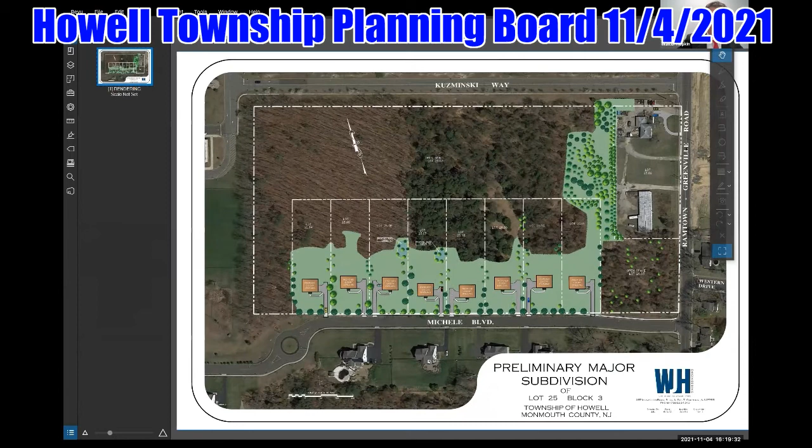I don't have the exhibit list with me, but I do have a rendering. Is this what's listed as A3? Yes. Did you submit this to me? I believe we did. If we didn't, I can switch over to just the black and white subdivision plans, because I don't believe I have this one. Let me, I'm having technical difficulties here. I apologize, I'm having a little bit of trouble. Take your time. You want me to put it on the screen? I think I have it, it'd be easier if I could refer to it. Let me, I know I have it, it's just a matter of getting it in front of you. There are many good things about virtual meetings, but one of them is not sharing screens.

Okay. Thank you for your patience.

So I'm referring to page 4 of A3, which are the subdivision plans that were submitted to the board, last revised October 20th, 2021. And just to reiterate a little bit of what Mr. Herbert indicated, the overall tract size is just over 20 acres. It's at the corner of Ramtown Greenville Road and Michele Boulevard. It's also bordered by the access way to your elementary and middle school, which is Kuzminski Way. There are existing buildings and an existing home that front on Ramtown Greenville Road, known as 238 Ramtown Greenville Road. It's all one block, also known as Block 3, Lot 25, and it is located in your RE2 zone. To the north of the site is the elementary school.

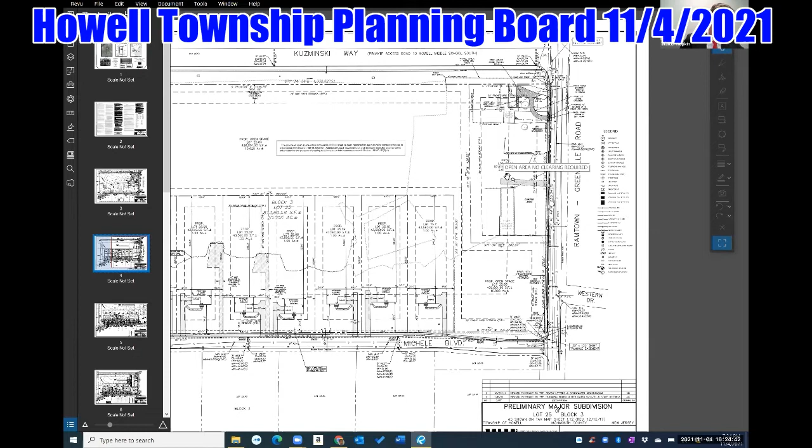So again, we will be cleaning up the lot that fronts on Ramtown Greenville Road. There will be 7 lots proposed. All of those will front on Michele Boulevard. If you drove through this area, it kind of looks like something should or would be proposed here. There are no new roads.

So the benefit of this is that you will get 7 new homes without any proposed roadways. The infrastructure is there for both water and sewer, which we will access for this proposed development. We will also extend sidewalk. Sidewalk is not currently on that side of the road, and we would extend sidewalk along the frontage as well.

There is 313 trees being proposed with this application. That's a combination of street trees, trees throughout the lots, and replantings in the area of clearing behind the existing home.

We met with your professionals, Ms. Spiro, and I believe we're in a situation where we do need to plant additional trees, but it was the feeling that we didn't want to take more trees down to install more trees. So it was our opinion that we proposed the 313. That was what the site could accommodate, and that we would make the monetary contribution in lieu of the remainder to comply with your ordinance.

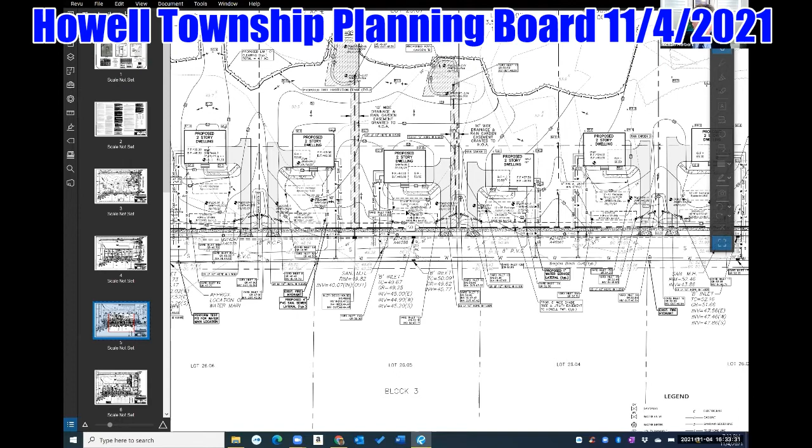Walter, just to emphasize the green area in the back, we're talking about the hash line in the back where the trees would remain. That's going to all be protected by a deed restriction, is that correct? We don't have that on the plan, but I believe it was raised by one of the professionals, or maybe even the applicant, as a good idea to ensure, because these are large lots, deep lots, that additional unnecessary tree clearing doesn't occur.

We could provide a conservation easement for review by your professionals. And again, we have worked closely with the board's professionals on this, and we do appreciate all of their input. They were very helpful in helping us design this in a way that would make sure the neighborhood was well protected and that we had a good product for the town. Is that correct? Yes, it is.

Anything further, Walter? No, I'm open to any questions that the board or the professionals may have. I hope I touched on all of the points that your professionals have asked us to clarify. And I can submit to you that any of the technical comments in either your board planner or engineer's letter, we would comply with as a condition of approval. Thank you, Mr. Chairman, the witness is yours.

Thank you. Not sure if anybody else on the board has a question, but could you point out with your pointer what you would consider the tree line that would remain, and then the remainder, which I'm assuming would be part of a deed-restricted conservation easement? Yes. So with this plan I'm tracing now, hopefully the board can see. Yes, so this would be the tree line.

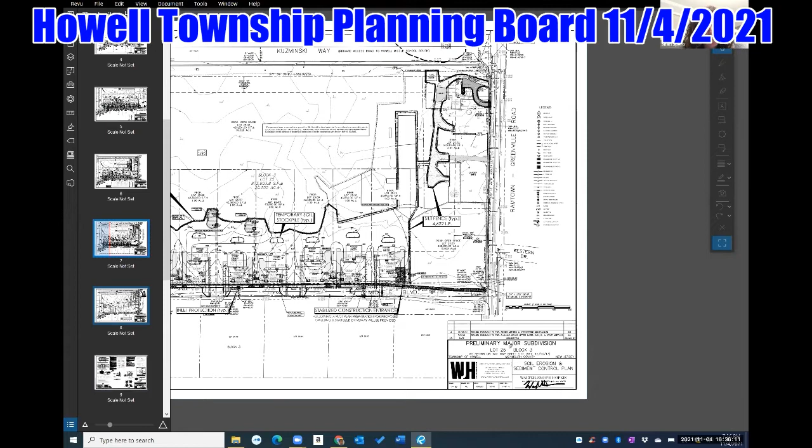Sorry, when you were just tracing that line, there was one discrepancy we saw on the plan. It's correct on the sheet you're on right now, but incorrect on this sheet. You see that square rectangle shape on the first two lots? That's supposed to be saved, but some sheets show it being removed. We noticed that too, and thank you for pointing that out. We'll clarify that on the subsequent submission.

Mr. Chairman, I have a question for our attorney. The first rendition they showed us, the color one, is that acceptable to put up for us to view, and for the people watching this to view? It's a lot easier to see, but since that wasn't submitted, can we use it? Well, we could use it, but it has to be marked in. So let's mark it in as a new exhibit, since that's much easier for all of us to see instead of looking at these.

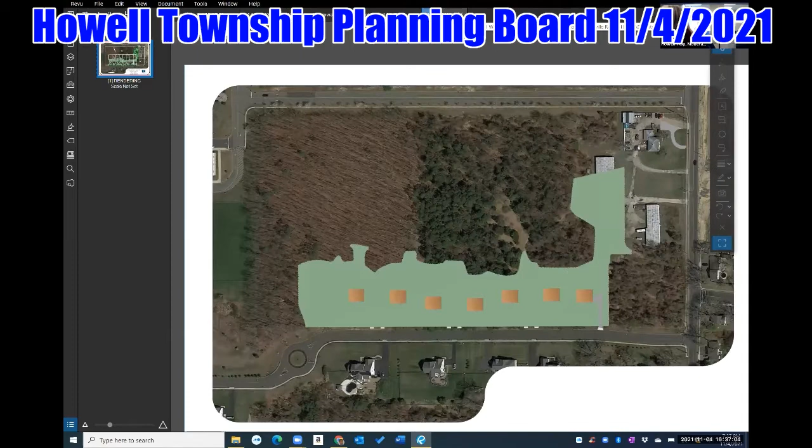I would agree. That would be A8. A9, I apologize, A9. And if Mr. Hopkin could at least identify it with dates and names for the record, please. Sure. What I'm referring to is a color rendered version of the plans that were submitted to the board. The date of the plan, the exhibit I'm referring to, is August 4th, 2021.

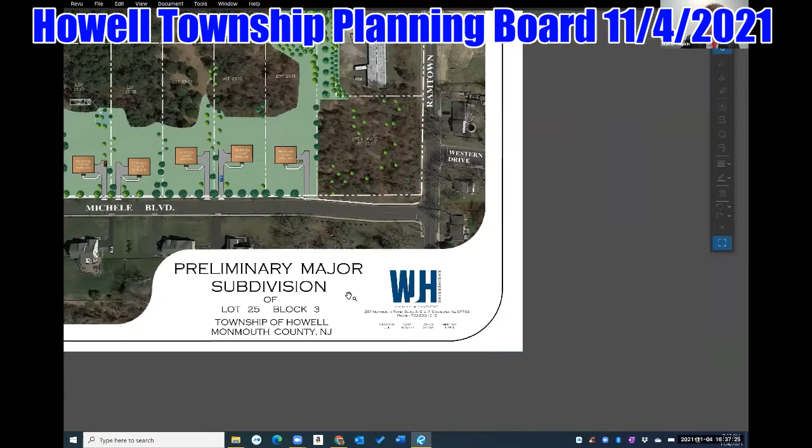Again, it's a color rendered version of the site plan, of the subdivision plan submitted, with aerial information superimposed. So this is much easier. Would you just make sure to send that to me, please? I will. Thank you.

Okay, thank you. Does Ms. Bell? Brian, before you go to Ms. Bell, I have a question.

I had an opportunity to walk the site, actually with a resident who is the HOA president. On the site, there is a strip of grass in front of the lots being proposed, that I was informed belonged to the previous HOA. So can the attorney or the engineer confirm, does their survey show who owns that land?

You're saying that the HOA owns the land on the other side of Michele Boulevard? On the strip, again this is what I was told, on the strip where the driveways are going to be encroaching. So from the curb to that strip of grass that's existing there now.

Mr. Nicastro, what I might suggest is, and this occurs sometimes, there is an area between the curb and where the applicant's property starts. That area is the municipal right of way. Some people see the curb and aren't sure what happens behind it. In this case, between the curb and our client's property is the municipal right of way. We did do a survey, because the HOA has been maintaining that area and not the township.

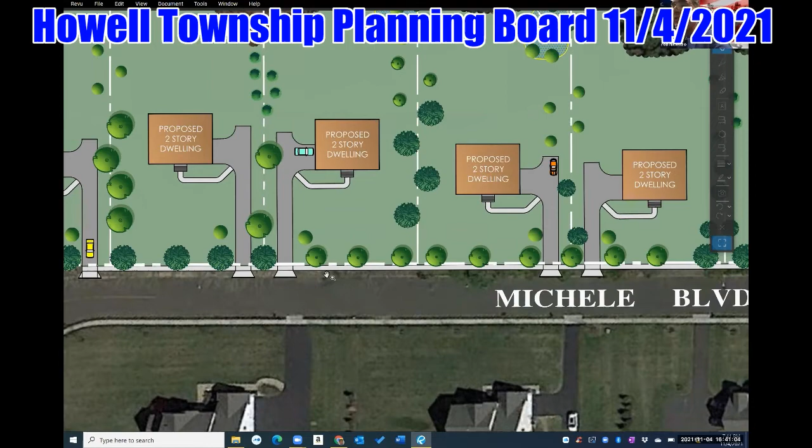I'm not aware of the HOA owning these entities. I do know that there's an inlet there. We wouldn't normally research whose responsibility it was. Well, I'm sure that resident is on as well, so I'm sure that what they have and what you have corresponds, or.

We're talking about a drainage basin that is on the corner open space lot, on Michelle and Ramtown Greenville. I don't see what it is, but again, my understanding is the HOA is responsible for that as well.

I'd like to hear more about it, but our client, the HOA, would accept that as part of this HOA's responsibility if it's on our side of Michele Boulevard, both the mowing and maintenance of that basin. Well, the only question is who owns it, and will you be impeding on their easement if it's the other HOA's?

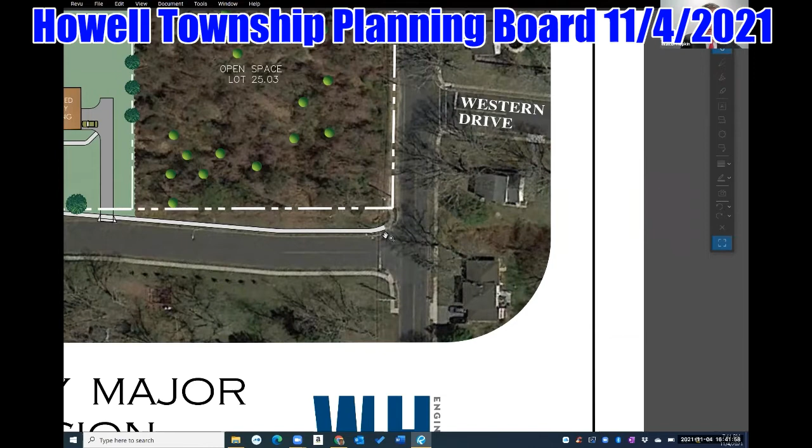I understand your point. There's nothing in our survey of this, nothing for us to believe that this is anything but a municipal right of way. But if there's additional information, we'll certainly review it. What raises my concern is that the township hasn't maintained it and has been making the HOA do it, and typically if it's the township's, they would maintain it. I think that's something we're going to have to investigate.

I can represent to you that we will maintain it. If we are approved here, we will maintain it. But we also have to make sure that we work it out with the other HOA as well. We don't want to impinge upon their rights.

You can maintain it, but if you don't own it, and they own it. That's exactly what I was trying to point out. Okay, so we'll get to that. I don't want to be late, but we'll get to that. But again, we want to be good neighbors, and we would maintain it.

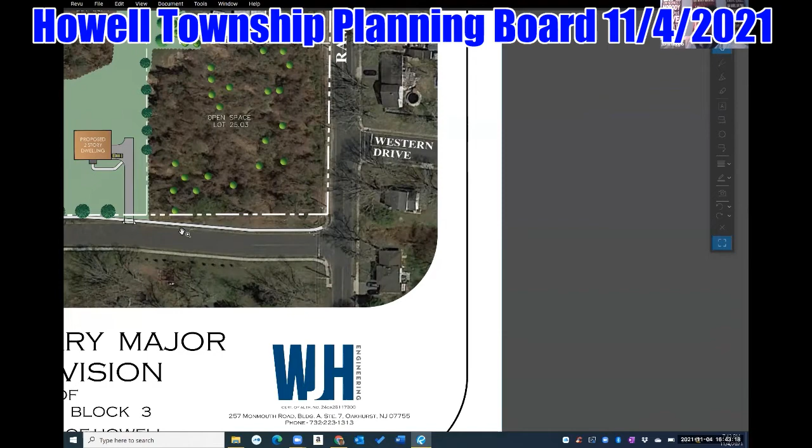Mr. Nicastro. John, you calling me? Because I could barely hear you. Can you hear me? John, you have a lot of echo. Volume in your mic is terrible. I don't know what to tell you. Still nothing? Can't hear anything? Try sitting back further from your mic. John, we can hear you, but it's very distorted. We can understand what you're saying, but it's very distorted.

Well, I have a couple questions too. As far as these recharge systems that they're proposing, collecting, can you hear me? Are we trying to suggest that there's going to be no runoff from those 8 existing, new lots? There's going to be no runoff from the driveways or the sidewalks going into the street? Because there's an issue on Michele Boulevard with their retention basin that's in the back of the property.

That they maintain, like Mr. Nicastro is talking about, that overflows. It doesn't empty out. They have a lot of issues back there with the builder. So any water that's going to come off of these 8 driveways onto Michele Boulevard is going to go into the sewer system and collect in their retention pond back there, which the people that buy these houses are not going to be paying for in their water bill.

Well, Mr. Leggio, if I could for a second, let Mr. Hopkin answer the question on whether that is in fact the case. Will any of the runoff from this development run into Michele Boulevard? So the site currently does drain towards Michele Boulevard. A significant portion of it does.

Is there any reason, Mr. Hopkin, looking at your topo plan, if you could pull that up? I believe it's sheet 5 of 11.

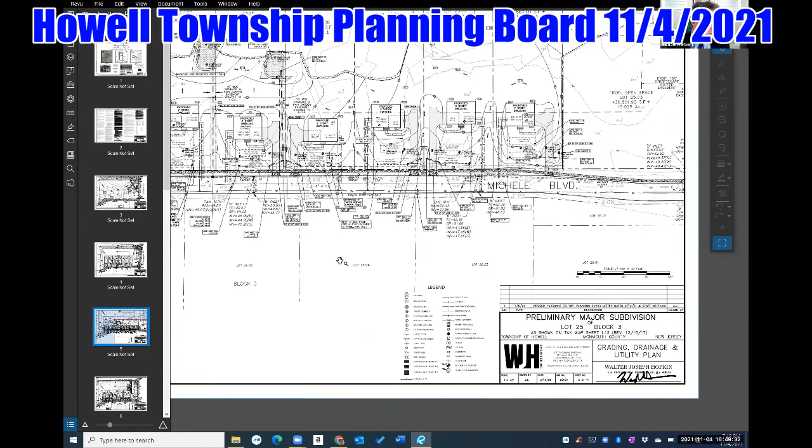By the way, Mr. Chairman, I don't know if Mr. Leggio could also call in on his phone, that way we could understand him a little easier. I don't know if that's possible, just a suggestion. It is possible, he'd have to log out, log back in. Well, I was thinking maybe he'd call in separately and just mute himself on his computer. I'm just trying to think of an easier way to understand him. See what the audio settings look like. If you go to Mr. Leggio, click the little arrow to the right of where you'd mute, click on audio settings. There's a slide bar for adjusting the volume of your mic. It may be that the volume is too high and it's over-modulating your voice.

Mr. Chairman, it sounds like you have some experience. Sorry, the electrical geek in me. I love it, I love it. I think we've all become electronic geeks with this pandemic. It's definitely increased the curve, that's for sure. Especially for us lawyers, I went to law school because I can't do this stuff.

Mr. Chair, if I'm figuring a few things out, I did have a quick question. Sure, just a minute.

From my understanding, the recharge systems essentially operate the way a septic leach field would. It's not a tank per se, but it is a passive drainage back into the water table. Is that right, Mr. Hopkin? Yes, that's similar. The tanks are for elimination or reduction of solids, and the fields let the liquid go into the ground. So it is similar, yes. Right, so in this case, you're using just the field minus the tank. Correct.

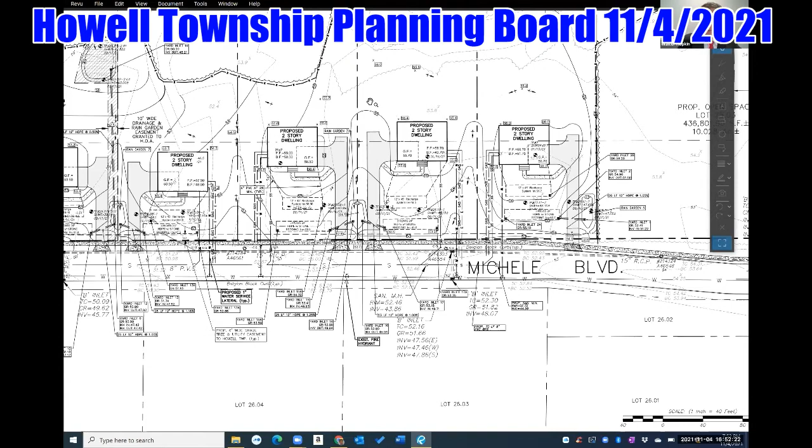Is there any reason why the grade couldn't be shifted so that the water drains towards the back of the homes and into the woods? Is there a reason for how you've done the grading? Yeah, because this is the way the natural grade goes. To shift it, it's called bucking grade, so we'd be sending water where it doesn't go now. This site, for the majority of it, drains towards Michele Boulevard.

Is the applicant aware that the middle school south also has their own drainage retention pond that overflows on a regular basis onto Michele Boulevard?

I'm sorry, but I couldn't make out what you said. We can't hear you, John. Can you hear me? A little better. A little bit. Just coming through really garbled. Yeah, if you go back to that same upper arrow. I did, Ryan, there's something that says switch to phone audio. You may have to use your... Switch to what? Switch to phone audio. You see it? Muting, it has no jack mic volume, that's all it's on here. I don't know, I'm not computer savvy. You still can't hear me? We can hear you, but it's so loud. It's not, we can't understand you. Is there a chat function that maybe he could ask his questions through? No. Yeah. I'm sorry, Mr. Leggio, I apologize. It's just difficult. Let me try.

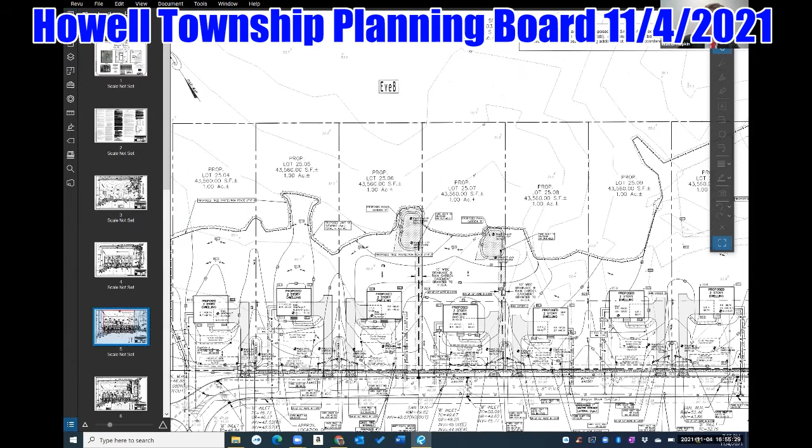I think we're eliminating that. Let me just make sure, thank you for clarifying. It wasn't just within the sight triangles, it's our intention to eliminate these variance conditions. You can see it here on Kuzminski Way, at the very top there's a proposed fence that extends off the existing fence. I think this is your existing conditions plan. Yes. So maybe on your site plan...

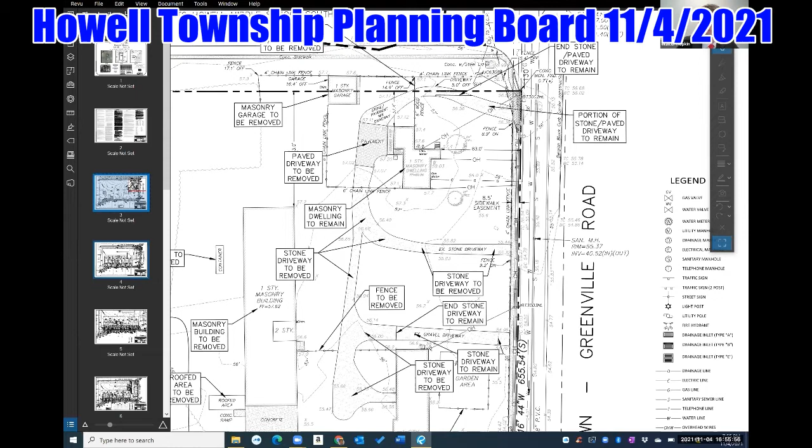Install 30 linear feet of chain link fence in addition to the existing. So is that still what you're proposing outside of the property line? I think that's just to reestablish that fence when the garage gets taken down. I believe it's the middle school or the school property's fence, so it would... we can take it down, but it was our intention just to reestablish it.

So you're saying you're doing it for the benefit of the school? Yes. I still think it would be a variance for that reason. Yeah, I mean, we can get rid of it, it's whatever the board's pleasure would be. Mr. Rizzo, if it's our decision, I would recommend that if the school board requires it to be maintained, it's maintained. If not, it doesn't need to be, and the applicant should go and ask.

I think that also goes in line with the fence in the sight triangle, which you can see on this plan too, that's the same fence line. So if you're keeping one, you're keeping both and vice versa. Let the school make the decision. Okay.

How's the school going to make the decision? That's not for me to figure out, the applicant will have to figure that out, right? We would go to the school and ask them what they want, and we'll comply with whatever that is. You can make it a condition of approval that we consult with the school and abide by whatever they want us to do with the fence. And if they can't do that, Mr. Nicastro, they'll have to come back to see us. We come right back to you because we want to make the board happy.

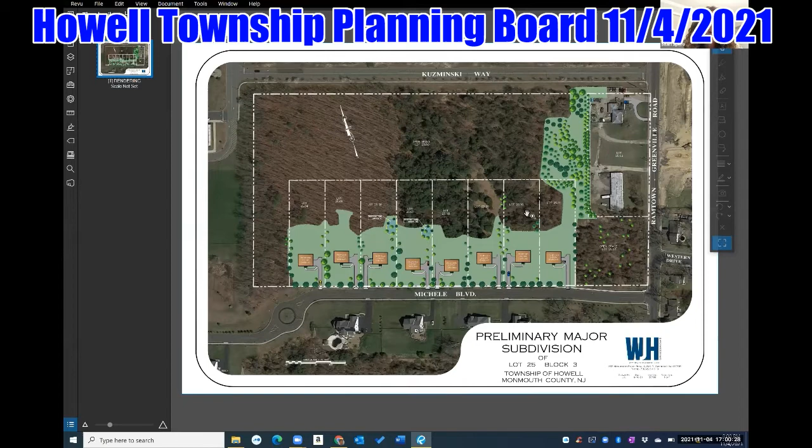So see in this picture, you see the wood. Yes, so that's the rectangle that was missing on the other sheet. So this is what currently exists. And it's kind of neat, you can see there's more evergreens on the right side of the property than on the left. This is a winter picture.

So you can't really just throw more trees in the treed area because they won't establish in the woods like that. We would have to put it in the light green area, which is just the homeowners' lawns. Fair enough, now I see what you were trying to explain earlier with that line not being right. Okay, yeah, all right.

So your recommendation would be to contribute to the fund. Yeah, I just feel like if you add more trees to these future lots, the chance of them staying is slim. People usually take them out to put in fences or pools or whatever. I think it would be more useful if it went into the bank and could be used throughout the township. I don't know how the rest of the board feels, but I feel comfortable with your recommendations, Spiro.

And my next question would be for Ms. Bell. What is the benefit? Why did the town create a 100-foot frontage buffer in the first place? And do you have an opinion on whether what they're proposing is in fact better for the town? I don't know why the town created the 100-foot buffer. I think the applicant has a planner who should provide some testimony as to why they think the buffer is a better planning decision. So I'd like to hear their testimony before I give you my feelings one way or another.

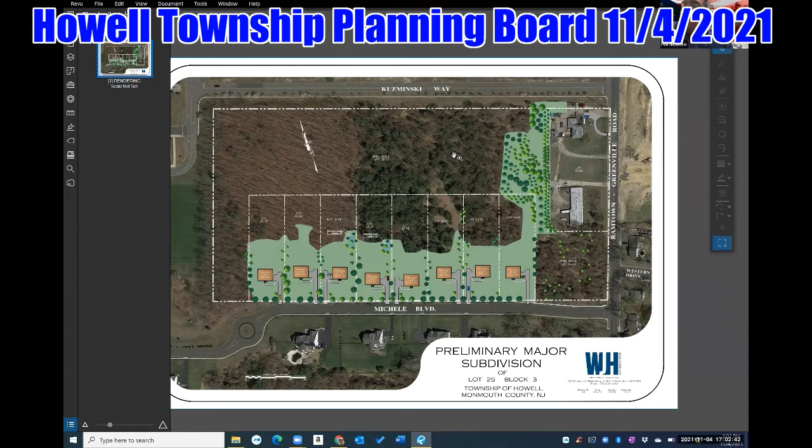Fair enough, thank you. And Chairman, before Christine goes off, Christine, would you agree that the setbacks they're proposing versus the setbacks that are existing will change the landscape of the area? Because the houses there now are set back significantly. It doesn't look like that from the picture, but in reality it is closer with the new homes to the street.

Right, so the homes they're proposing are closer than what is there currently. So do you agree that will change the scenic landscape of coming into this development from what exists? I believe it makes sense, that you're proposing more development than is there currently.

It's not the more, it's just that it's not gonna look the same when you come into this Michele Boulevard development, where on the left you've got houses set back much further than houses on the right that are closer to the street. Correct.

I could understand their point where they don't believe that's accurate, that there is a significant difference. Clearly from this plan, they're not set back. We haven't surveyed the homes across the street, but it does not appear to me that they're significantly different. They're in keeping with the character of the neighborhood.

But you have not surveyed the other properties to see. No, but we're all looking at an aerial right now. I think there might be some on the other side that are a little bit closer, there might be some about the same, and then there might be some — it's a range.

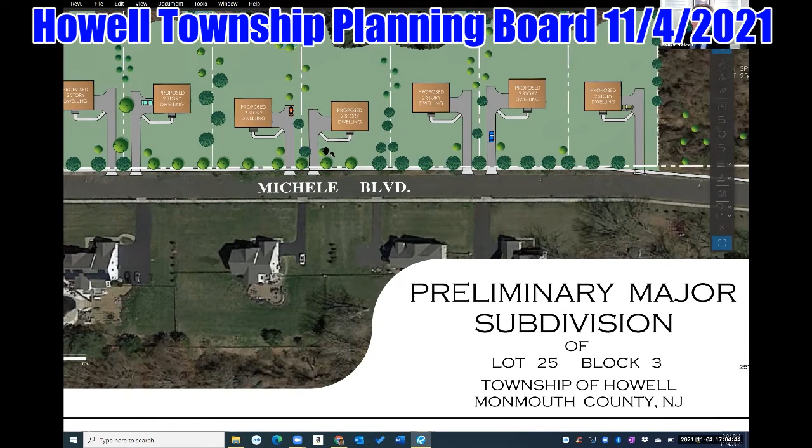Based on this plan, they're certainly not set 100 feet back with a vegetated buffer. I think we can all agree on that, but it's hard to tell unless you had measurements for both sides of the street. But I do think, as Walter pointed out, if you look at the aerial as it stands right now — and I'm just taking my pen, for want of a better tool, and measuring how far it is from the street, and you have the houses across the street — it's not that much of a difference.

And those are the close houses. The further back houses, I would argue, are even further back than the ones across the street. I do want to point out that the 50-foot buffer requirement is a township-wide zoning requirement, whereas the 100-foot is specific to this zone here.

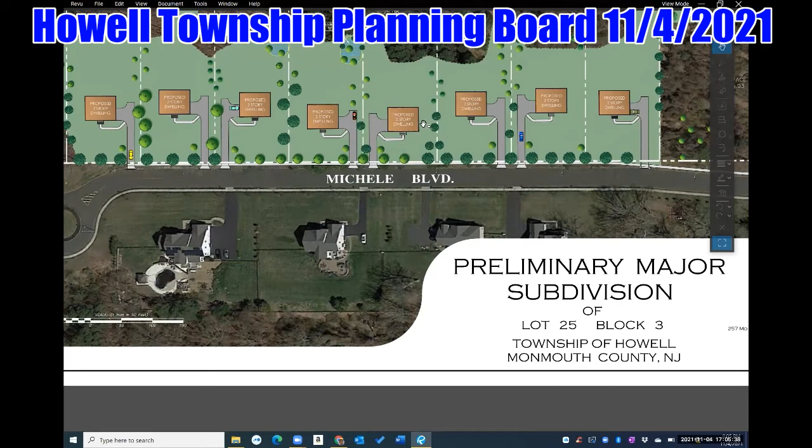Mr. Herbert: my question about these lot frontages — it's not keeping with the same character of Michele Boulevard, the existing houses that are there now. I understand you had to chop this up to get these eight units in here, the way you have it designed, but we're not keeping the same look that the people on Michele Boulevard paid a premium price for, these lots and houses. And now we're going to change the aesthetics coming in off Ramtown Greenville Road.

That's a very good question. What our planner and engineer have already pointed out, and you'll hear more from our planner in a few minutes, is that we're also preserving a lot of land out here. That's why you have smaller lots than the lots across the street. But I'd argue that even though those lots are smaller, they preserve a lot more land than the houses across the street, making for a more bucolic and aesthetically pleasing setting.

Let me ask you another question. The existing home on Ramtown Greenville Road that was built in the 1940s, the piece up by the Kuzminski Way — I know there's an agreement you're taking down the garage because a portion of that property is on Middle School South's deed. But you also have this chain link fence that goes all the way down Ramtown Greenville Road. Is that staying, or is it coming down? Walter, if you could just address that.

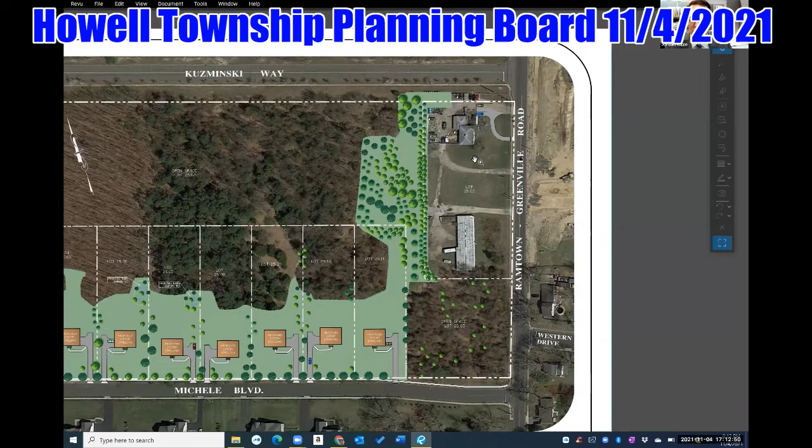But again, Mr. Leggio, my client would be glad to take down that structure. Mr. Hopkin, can you point on the screen to the structure you're discussing? I'm not sure exactly which one we're talking about. It's the one down by the woods, Walter, the larger structure by the woods. This one? Yes, okay.

I just don't, Mr. Herbert, understand why you're not clearing everything. You have a rundown 1940s style farmhouse that's just all run down. The place is old, and your client bought the property with the intention of making a brand new subdivision. You're looking to cut costs or save money on not removing certain things, leaving certain things. We're trying to improve the area, and we're leaving structures up that are from the 1940s. It just doesn't make any sense to me. That's the issue I have with leaving the structures up.

You know what I mean?

If you want to leave the 8 houses on Michele Boulevard and then create your 2 lots on Ramtown Greenville, and then plant some more trees and some more nice open space, that would be a lot more aesthetically pleasing to driving by and heading into the schools on a daily basis than leaving this other stuff up.

That's my only question. So, let your planner explain it to us.

Thank you. We have somebody living there right now, so you have a family situation. The client didn't want to remove the house at this point, but it may be down the line that we are able to upgrade the house. But as of right now, given the family situation out there, it didn't work. That's something we can talk about down the line. But again, very good point, and I completely understand where you're coming from.

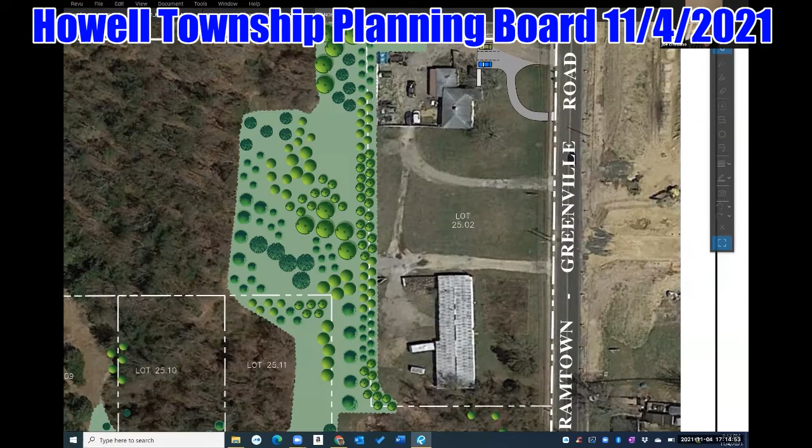Gentlemen, I have a question. Down Michele Boulevard, there's probably 6 streetlights. I'm assuming they put them on the other side of the road because when they built the development, they didn't want them on the house side. What now happens to those streetlights? I think I count 6.

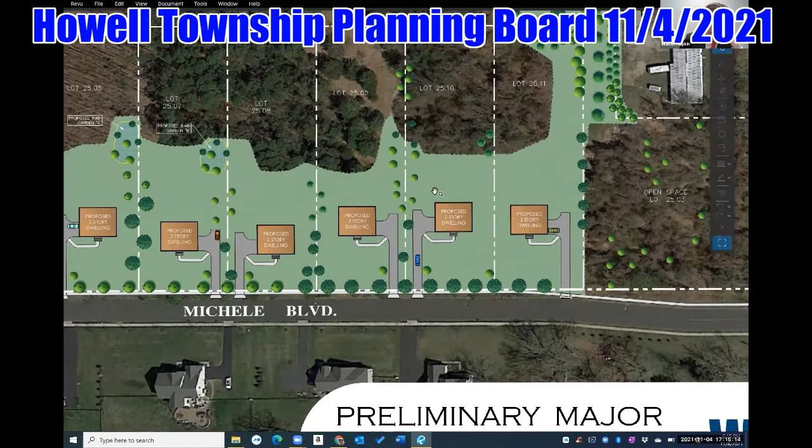Walter, if you could address that. Well, if the streetlights are within the right of way, they'll remain. I'm not sure specifically what the question is. Yeah, I'm looking at them now. They'll remain. And I understand you're putting curbs in, correct? Curb exists. We're putting in sidewalk.

Okay, so the street lamps would not interfere with the sidewalks being installed? Correct, they'd be between the side—sorry, didn't answer your question very well. Yes, they will remain between the proposed sidewalk and the existing curb. Okay, thank you. Yes.

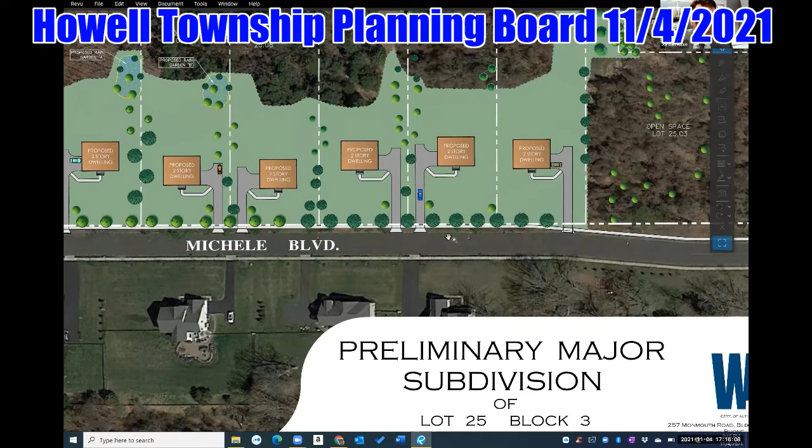So I have a few more questions for you as well. Just to clarify the deed restrictions, per the ordinance, the first deed restriction is for the proposed lot 25.03, which is your open space. That'll be deed restricted for agricultural and conservation use. And then the second deed restriction is for each of the smaller lots, that they won't be further subdivided in the future. That's correct, we would agree to that. Okay.

I believe you mentioned that all of your drainage systems will be the responsibility for maintenance by the HOA, and that's all the rain gardens and all of the underground systems? That's correct, yes. Okay.

The driveway locations, are those going to remain through plot plan stage? I know the houses might change in size or move a little bit, but it looks like the driveways are set up right now so that the rain gardens are based off that, and the grading is based off where the driveways are. So any relocation of those or changing of sizes might impact the drainage. So would you agree to keep those in place? Yeah, that's a very good point. Yes, we would agree to keep the driveway locations as they are approved.

Okay. And just to point out, Mr. Rizzo, with regard to the conservation easement on the individual properties, that would tie in with the grant of the variance to the buffer. So just so we're clear on that.

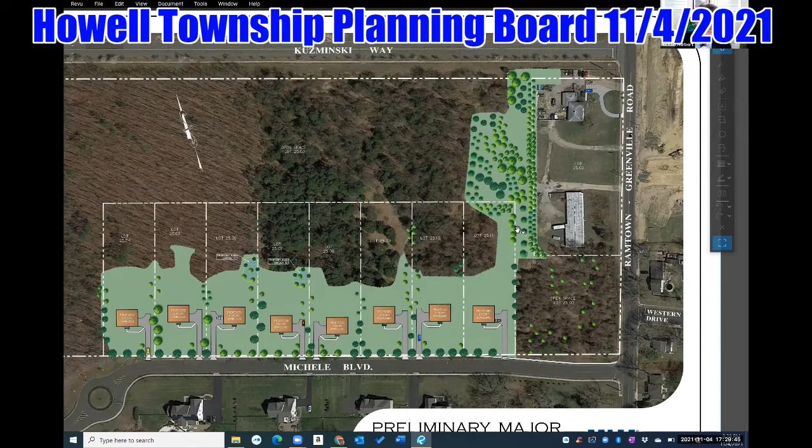And then what's your third professional going to be? What is theirs? We only have two, Mr. Chairman. I also have with us the representative of the applicant, Aaron Munster. Okay, got it.

So is Mr. Osceola going to testify now? Yes. Okay, Mr. Osceola, I'd like to swear you in. Do you swear the testimony you provide before the board this evening will be the truth? Yes, I do. Can you please give us your business address for the record? It's 125 Half Mile Road, Suite 200, Red Bank, New Jersey, 07701.

Thank you very much. Good evening, Mr. Osceola. Good evening, Mr. Herbert. For the benefit of the board, if you could give your educational background, by whom you're employed, and how your expertise is before this board.

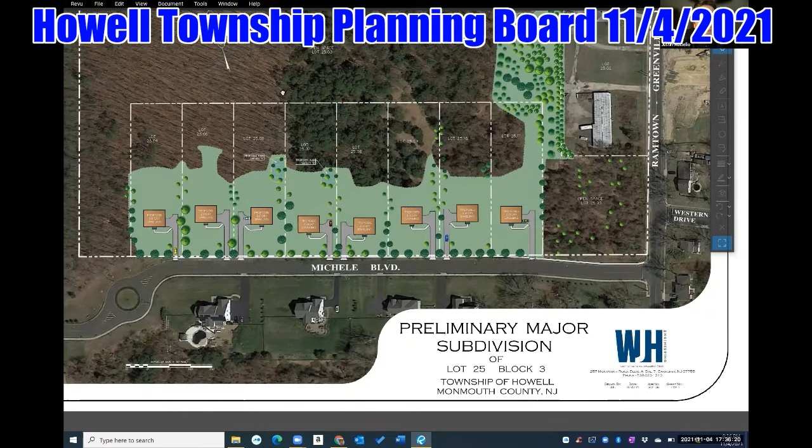So with that said, in my opinion, this is a better design. I believe Ms. Bell was asked a question earlier relative to the consistency of what's proposed this evening with the houses on the other side of the street. Walt, if you can pull up the rendered aerial site plan, please. I have a bit of a delay.

Okay, there it is. Even though we don't have the exact measurements of the setback from Michele, I think it's clear that what's proposed is generally consistent with the character of the area. I'm not going to say it's entirely consistent—there are, of course, some houses closer than others—but relative to the 100-foot buffer requirement, it's generally consistent. It's also clear from this aerial that none of those houses on Michele meet that 100-foot buffer requirement either. So when we look at the consistency of what's proposed with the character of the area, from a planning standpoint we are generally consistent.

Walt, if you can please remove that. So that's what's known as the positive criteria. As the board is aware, there are purposes of zoning from the MLUL that I believe we advance—criteria C, light, air, and open space; criteria G, sufficient space and appropriate locations. This is a permitted use in the residential zone, and as you saw, no variances are required from the dimensional aspects or bulk requirements in the zone, so those purposes of zoning are certainly advanced.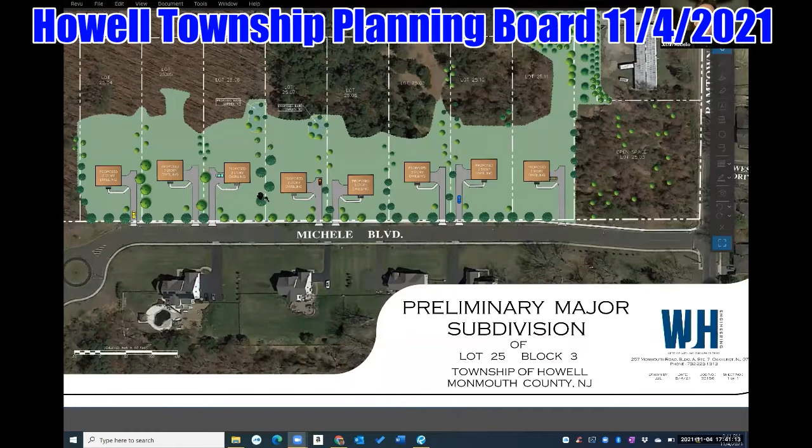Would you mind pulling that up as well, please? So sir, I think your question is the ratio relative to the amount of homes proposed on the north side of Michele versus the amount of homes that exist on the south side. Is that the question? I understand it's virtual and a depiction, but to me one side looks very dissimilar from the other. It visually doesn't characteristically make sense, it doesn't seem congruent to me, and that's maybe more fact.

Yeah, I think I got everything you're saying. I'm having a bit of an internet issue on my end, but to answer your question Justin, it's 8 homes on the north side, 5 on the south side, so it's 8 to 5. And from the planning standpoint, we believe that what's proposed is a better plan. Not complying with the buffer requirement is a better planning alternative in my professional opinion, because we are retaining more woodland, we're reducing the amount of coverage. If we had to extend those homes back and comply with the coverage, we could, be by right. We could come into this board with a conforming application that will meet the code. So I think what's proposed here is a better planning alternative relative to 8 homes versus 5.

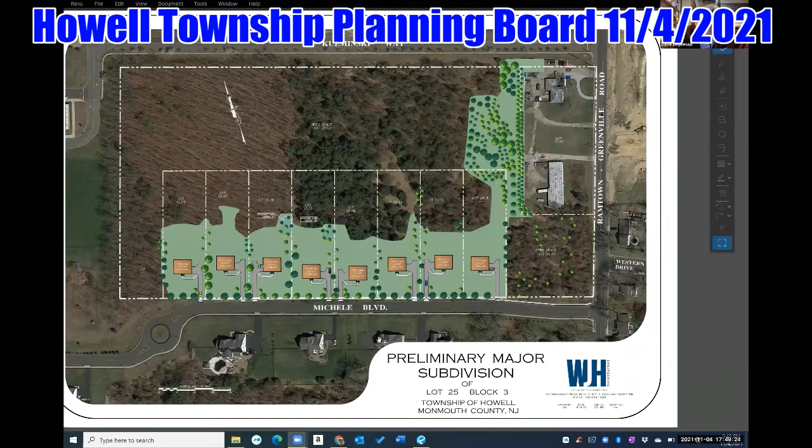I'm going to have to use my phone here because I can't share my screen with you guys. If you could all look at their proposed property lines, you see how their property line on the front right corner over there against Ramtown Greenville Road and where Michele Boulevard cuts in - you see the gap all the way to the right?

So the HOA owns the 5 feet across the street, which you guys would like to cut through. That's not township property. It might be township right-of-way - every single block in every single town has a right-of-way on every sidewalk you walk across, technically a township right-of-way. 3 feet back from every sidewalk is a township right-of-way. So that's the first thing, right? So we have that.

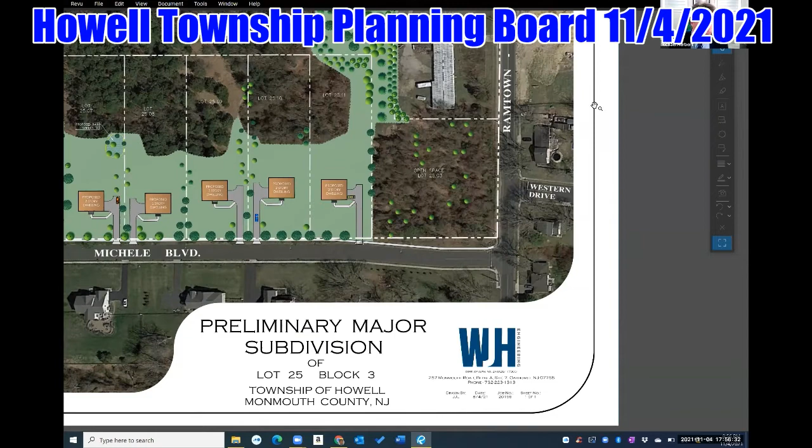Do the professionals or the attorneys want to answer that question? Sure. First of all, it's not the same owner. With regard to our site, and it's all we can focus on here, we will be providing a construction schedule to your professionals if we're granted both preliminary and final approval. We will adhere to whatever schedule that is, and again, work closely with professionals to make sure this is carried out. It is in the interest of our client to get this development underway and have these homes ready for sale as soon as reasonably possible, because you can't make money if you don't have a house to sell. So they'll proceed and work with the professionals on a schedule that everyone can live with.

All right, one of my last questions: what's the hardship here to create 8 houses? Why not create 4 like what we have here? Well, as you heard testimony from both the engineer and the planner, we looked at the overall zoning. We chose the open space, or clustering, approach so that most of the site was open space, and that worked with having the 8 lots close together to make the whole site function, providing a lot of open space on the land and maintaining the bucolic character of the neighborhood.

So why can't you do that with 5 houses instead of 8, and make it conform to our block?

We would argue that it does conform because we are offering up a lot of open space. Actually, we would argue that with all the open space, it's better than what you have there now. You have approximately 3 houses to my 1. No, I would disagree with you, but I understand where you're coming from. But again, we went with the open space. We are complying with the zoning out there. We're not asking for any extra houses, we're asking for what this type of zoning allows for this kind of situation. And we're also proposing a supermax stormwater system to make sure the neighborhood is protected and this property is protected as much as possible.

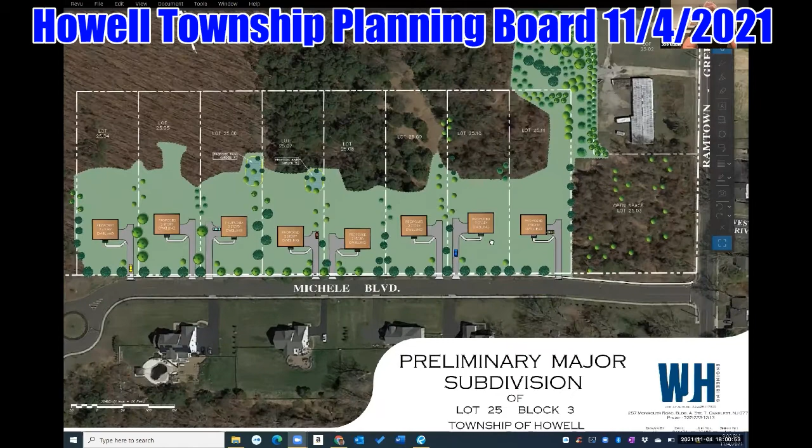So you could see on the corner of Michele and Ramtown Greenville where it widens out there. Mr. Nicastro actually talked about that catch basin. It's not a retention basin like you'd imagine holding water, it's actually a catch basin entryway to the stormwater system that has large riprap rocks there. The reason the town has us maintaining that, and it's part of the HOA, is because when the neighborhood was built, the town made the developer basically take ownership of all stormwater management. The town did not want any input, shouldn't say input, but they didn't want to take any responsibility of the retention basin in the back of the neighborhood or any of the stormwater facility we have. So that's why we own that little strip of land.

In some cases, I believe on that corner, it's around 10 to 15 feet, smaller sections about 5 feet, and the driveways actually do encroach on that. So that drainage system is the reason why we own that sliver of land, and Michele Boulevard wasn't the property boundary there. As far as the drainage goes, all of the stormwater systems run on Michele run to the basins. I think one of them is over by Middle School South, and then there's a further one down behind all the way at the back of Michele.

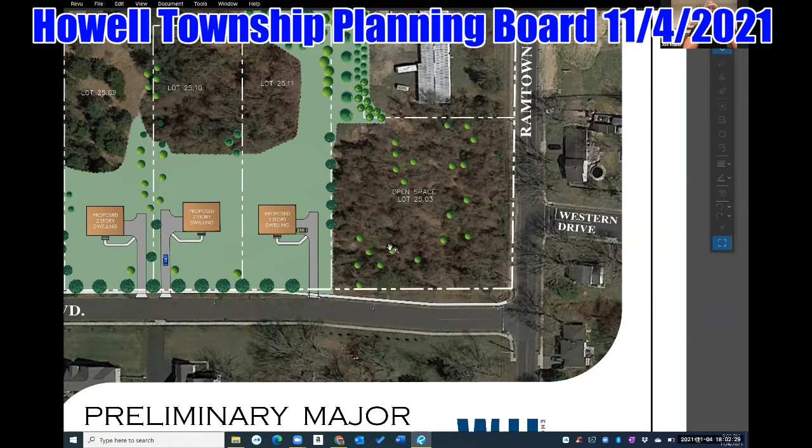That one is constantly filled with water. When that was designed, it was supposed to be a dry basin, supposed to percolate down. There's no outflow structure at all there. Since we've lived here for 7 years, that thing has been dry maybe 4 days out of the whole 7 years. We've had major problems with that. We're still in talks with the developer trying to settle. The town still holds the bond on that because it is a failed basin. And these 100-year storms that we get every year now completely fill that basin up, and it's a complete failure. So now by putting more homes there that will have runoff onto Michele, it's now impeding on our stormwater system that doesn't work as it is now.

So, Mr. Maurer? Yes. This is Steve Tombalakian, I'm the board attorney this evening. Can I ask you a question? Sure. When you say that your HOA owns a 5-foot strip on the other side of Michele, meaning the applicant side of Michele, can you tell me where you think the extent of that 5-foot strip starts and ends? Well, you could see right on the left-hand side where that circle is, you could see where it actually goes off the roadway.

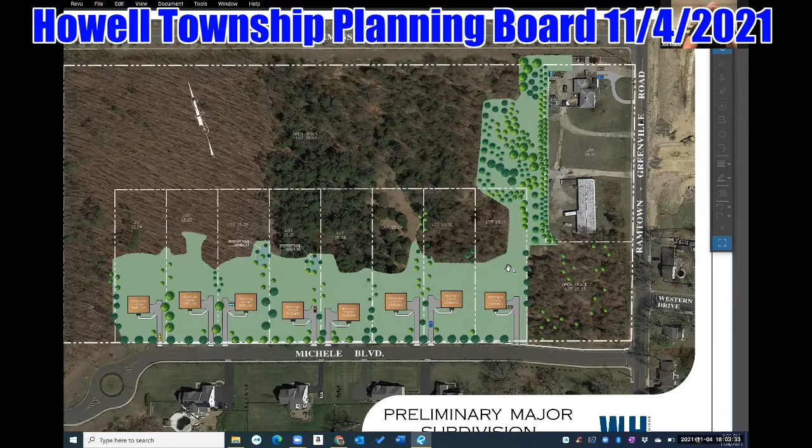As Mr. Eskenazi said, if you looked at the original maps when he bought his house, his property line actually extends with the lot and block number across that circle, across the street, to the edge of that corner, and cuts off on his other property line. He was correct — he did deed that over to the HOA to maintain, because it didn't make sense for him to run his lawnmower across the street to mow a small area. So the HOA actually maintains that.

And does that ownership continue all the way to Ramtown, Mr. Maurer? It does. Okay, now I have to ask this question.

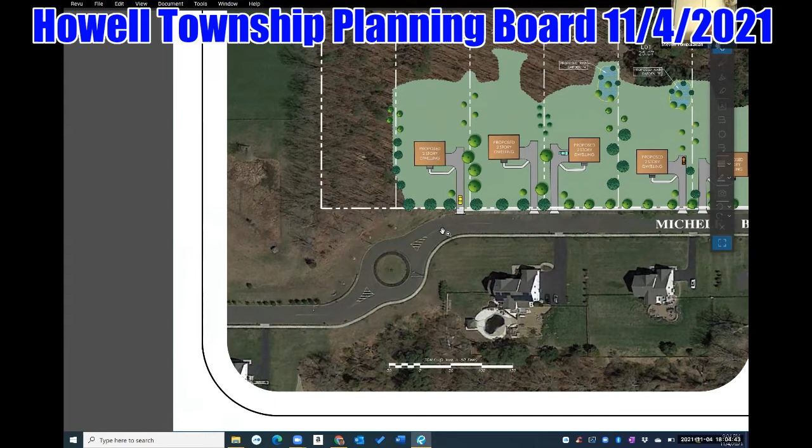Is it your position, or your homeowner association's position, that the applicant appearing this evening does not have frontage on Michelle Boulevard — that your strip lies between the applicant's property and Michelle Boulevard? Yes. That's very interesting to know. Their only frontage is on Ramtown Greenville.

Okay, sorry to interrupt your testimony, Mr. Maurer. Mr. Herbert, I know you're hearing this for the first time this evening, but this is a pretty important point that the homeowners across the street are making. I'm not putting you on the spot, but if you're effectively asking for frontage on Michelle Boulevard, the board needs to know whether you have the legal right to that frontage. Again, not putting you on the spot tonight, but that's something we need to nail down. Of course, Mr. Timberlake, I understand exactly where you're coming from.

I'm a board attorney for many towns, and I've asked that same question. We would argue that we do have access to the road there. If any of our driveways go over the wider portions — there's an easement there for access — but anything over the wider part, we can always move the driveway. That's not a big deal. But if we were granted preliminary approval, that is something we'd have to nail down and correct if we came back for final.

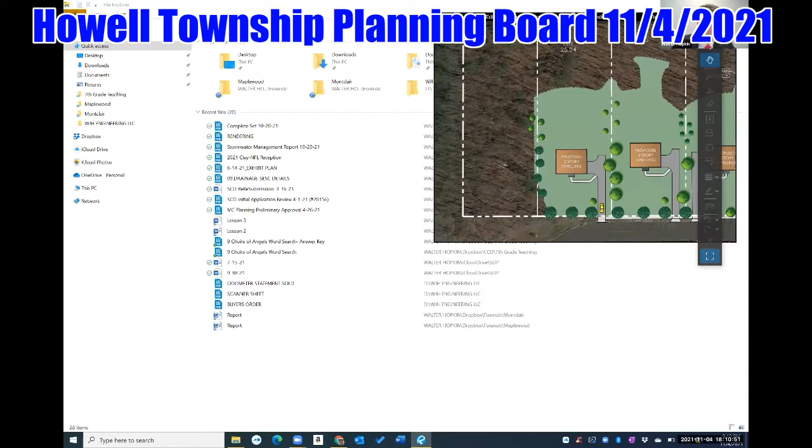That is sheet 1. That's correct, it's the cover sheet of the subdivision plans. Let me try to get there. Thank you all for your patience, but I know this is something that's important to everybody. Especially the attorney - we want to make the attorney happy here.

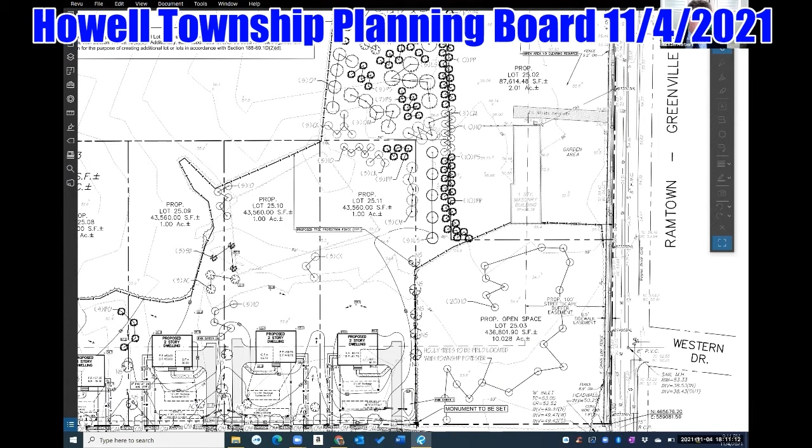Okay, so our office did prepare this survey. I don't recall any issue with regard to a private easement, but this is the tax map. This is Michelle Boulevard. In my opinion, it's clearly shown as a municipal right-of-way which connects to Ramtown Greenville Road. And our subdivision - all of the driveways front on Michelle Boulevard.

Okay. Thank you, Walter. Mr. Chairman, I believe Mr. Eskenazi is putting up his hand. Yeah, if you don't mind, if you could bring your tax map back up again. Sorry, quick on the trigger there.

If you look at your bottom left corner there in front of Ramtown Greenville Road, you'll see the offset of Michelle Boulevard, but you don't see the offset of the property lines that we showed you. You see how the road curves there a little bit? Yeah, that's on your side of the road? So if you can zoom into that little corner, please.

Okay, you see the offset - the road width stays the same. The front drainage that Joe was speaking about earlier, that the town wanted nothing to do with, is in that front corner right to the left of where it says R equals 15 feet. Right there to the left of your cursor, right to the right of your cursor now. To the left of your property line, correct.

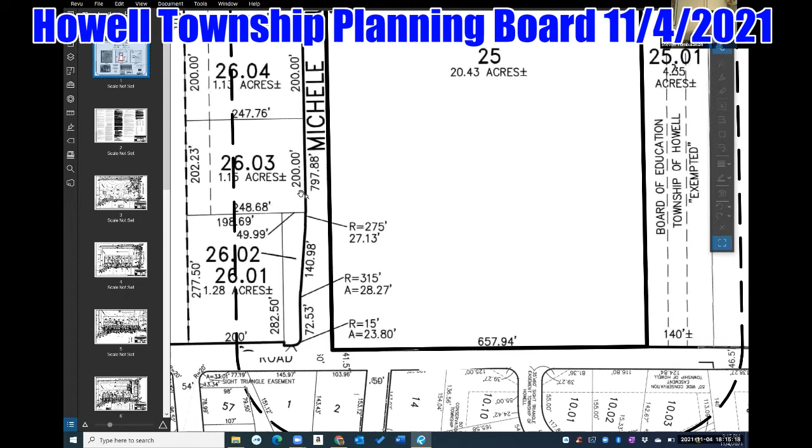Yeah, because Mr. Maurer, I asked Mr. Maurer if looking at this tax map now, it shows that the applicant's property is like a rectangle. Is what you and Mr. Maurer are saying is that you believe the homeowner association owns a strip of land to the right of the Michelle Boulevard right of way, so it's sandwiched between the applicant's property and Michelle Boulevard? Correct. If you go back to A9, their overall map will depict exactly what we're saying here, that we own that piece.

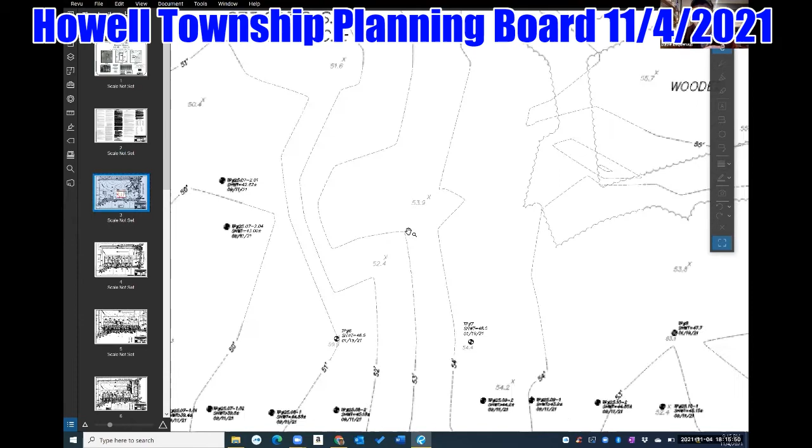And Ryan Holmes strictly, it was very explicit when they told us that when we bought the houses. One of the reasons why I chose this property, I was the first one to build on this block, and one of the reasons why I chose this was because they said that we own the first 50 feet across the street and nobody would ever be able to build there. The worst that could happen is somebody would build in the middle of the lot and we'd have a 50-foot buffer. And look, we're good with them building, just not on our block. Let them build their own block. We're not fighting them building.

Mr. Eskenazi, do you have any documentation that would state what you just said, that Ryan Holmes told you? It was all in our mortgage and when we bought the houses, whatever items that we deeded over to them in the beginning. It would all have to be through Ryan Holmes. You'd have to dig it out of them. But I have the map here. Right, but do we have some type of documentation showing the metes and bounds for that area?

I mean, I have this picture here. If you want me to text it, or maybe I could email it to Eileen here, and she could have it. You're saying it's depicted on our plan. Is this one of the plans that depicts the strip that you're referring to?

Correct. So again, I would suggest that the strip that Mr. Eskenazi is referring to is actually the area between the curb and the municipal right of way, which is very common in roadway design. It's not the homeowner association's.

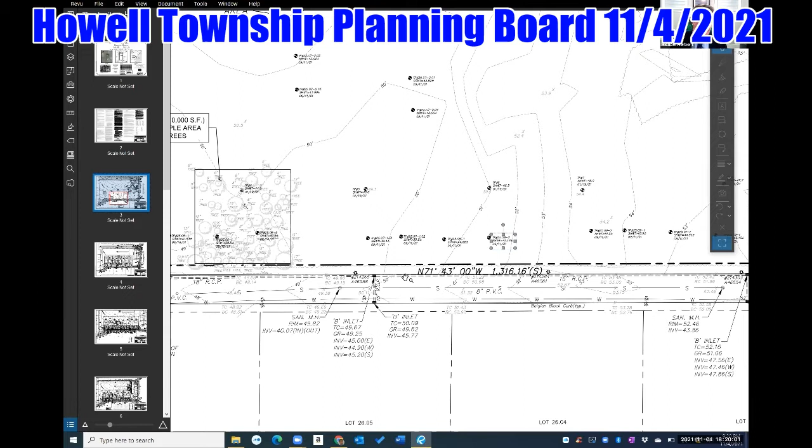Understood, Mr. Chairman. I can tell you we have hired the Atlantic Group to finish the environmental investigation. I was going to argue that can be a condition of approval, that's the way it's normally handled. But we want this board to be comfortable, and we want you to be comfortable as chairman, so that's something we can talk about addressing.

For me, it's a big issue, especially being near other residential homes and a school. Of course, and look, we're building homes out there, we want it to be safe as well. It's in everyone's best interest that both the title issue and the environmental issues be solidified.

And again, we can work with Mr. Rizzo's office and with CME to make sure they are satisfied as far as the environmental issues go, and as far as the survey issues go, and have assurances to bring back to you. Stephen, am I off base in making that recommendation?

I think this application has heard the public testimony. We'll wait to see if there's anybody else in the public that would like to speak, but I don't think we can come to a vote on this right now. I think there's too many unknowns.

No way. Again, the environmental issue is a separate issue aside. My concern is the legality of connecting to Michelle Boulevard. Before the board votes on this, we need to make sure the applicant has those legal rights without requiring an easement or some type of authorization - the tax map doesn't show it, but we really need to look at the title and look at the deeds to see. I agree, absolutely. Again, it's too important an issue to just punt and deal with it at final. It's too important.

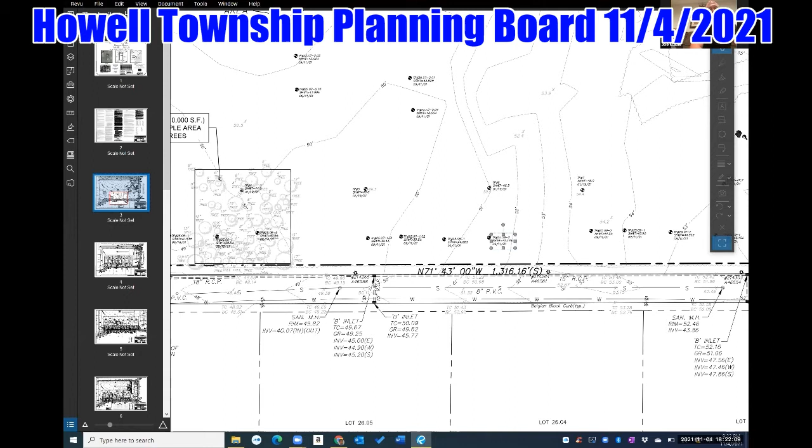Yeah, I just wanted to touch back on the tax map, what Mr. Eskenazi was saying. When that picture was up with the tax map, it doesn't depict Michelle Boulevard in that strip correctly. It doesn't even show the boundary of the roadway. It's showing the property line of this lot, but it's not actually showing the roadway.

And we all on the board agree with you, so the applicant has to go back and do their homework. Okay, thank you. Just to be clear, tax maps don't show the paved right-of-way, they're not intended to. Right, and our plans also depict the right-of-way on both sides as the tax map.

I understand we need to prove this to you, but I can tell you on my side there's nothing here that concerns me. We'll provide the board and your professionals with the information they can be comfortable with, and quite frankly the homeowners across the street can be comfortable with as well. Anything else, Mr. Maurer? No, that's it.

Thank you. Eileen, is anybody else from the public raising their hand? Yes, I have two others, Ed Vanga. Actually, there's three others. We've been sitting here for about 2.5 hours.

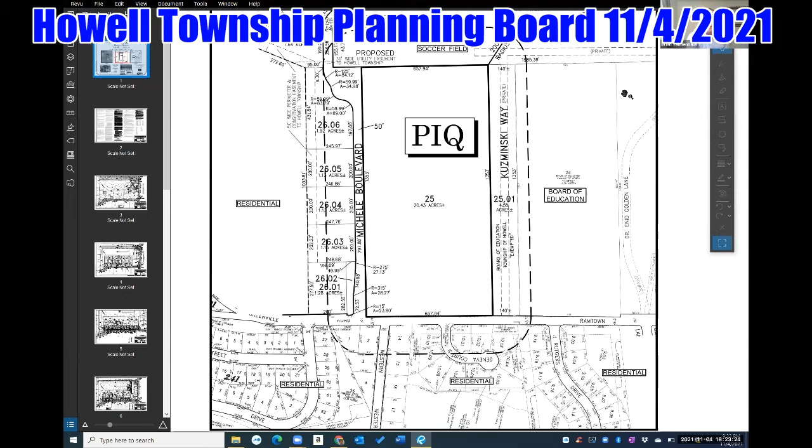Steve, what do we want to do with time? You're asking me? Yeah, the next application, I don't know how involved it is. But I'm not familiar with the board's policy on when you don't start a new application or when you stop that type of thing. Even if we got through another 10 or 15 minutes, I'm not sure how far we're going to get. Perhaps we want to ask the other attorney's opinion of what they want to do. I mean, I don't particularly want to be here till midnight. Sure.

Who's the attorney for Pioneer? Oh, it's Sal Alfieri, the famous Sal Alfieri. Sal, you've been watching the proceedings, you see the clock, you see where this is going. What do you suggest? Well, it depends. If you're going to break at 10 o'clock, then it's not likely we're going to have more than 5 or 10 minutes to present. If you're willing to go past 10, we would go as long as you allow us. So it's really up to the board on how late they want to stay up tonight.

And I've enjoyed watching Mr. Herbert all evening. I'm glad I'm entertaining you, Sal. It's up to the board. I'd be willing to go to 10:30, but that's as far as I could probably stand. My eyes are already heavy.

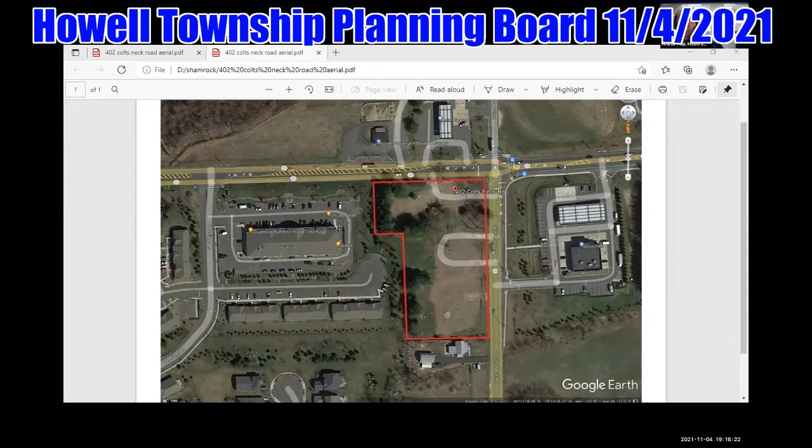Can the board see this? Yes. Okay, and this is a sheet from the plan set that was submitted, is that correct? Yes, sir. And it's marked as A3, sheet 3.

The applicant is proposing to construct a 1-story building approximately 154 by 75 feet long, or 11,550 square feet. The building will have 5 medical uses and a small cafe in one tenant space.

Access to the site will be via right-hand in and right-hand out on Route 33. There is also a full movement driveway located on Colts Neck Road, placed directly across from the existing QuickChek driveway.

A paved parking lot is being proposed which will accommodate 91 cars, as well as 1 unloading space for deliveries. The parking calculations require 72 spaces, so there's adequate parking on the site.

There is a trash designated area for refuse pickup located on the southerly end of the project along Colts Neck Road, approximately 52 feet from the adjacent lot line.

With regard to zoning, there are no bulk variances requested, as the layout meets all setbacks and coverage requirements. However, relief is requested to permit part of the parking lot inside the 50-foot perimeter buffer to the non-residential use. This is up in the northwest corner here, this arc. This relief will be discussed in detail during our planner's presentation.

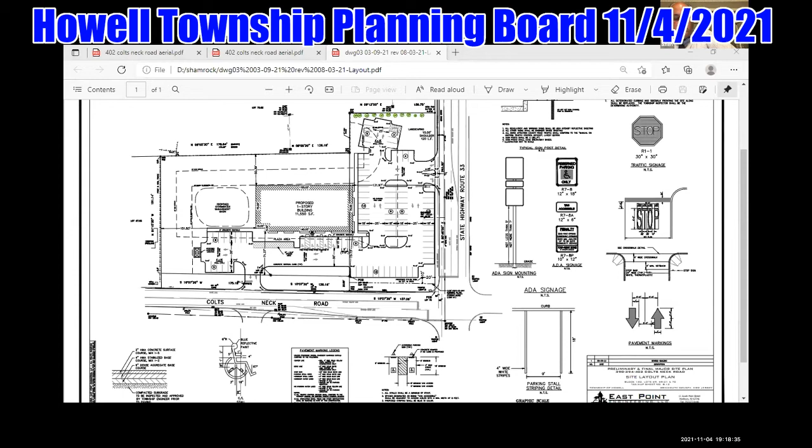Okay, can everyone see this plan? Yes. Okay, it's a split system.

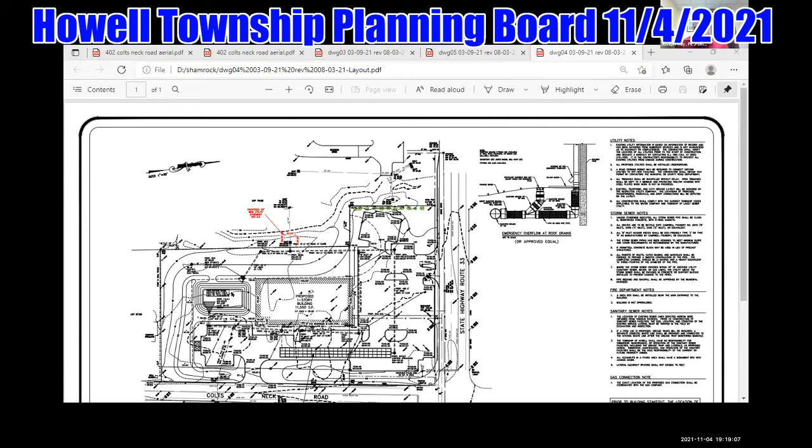The roof area, which is considered clean, will be going into an underground parking lot recharge system along the easterly portion of the property. To the south end, it will take all the parking lot runoff and it will be retained and slowly let out into the existing storm sewer system where the site currently flows. The ultimate discharge point has not changed. The proposed rate of runoff is being reduced in accordance with your ordinance and DEP requirements.

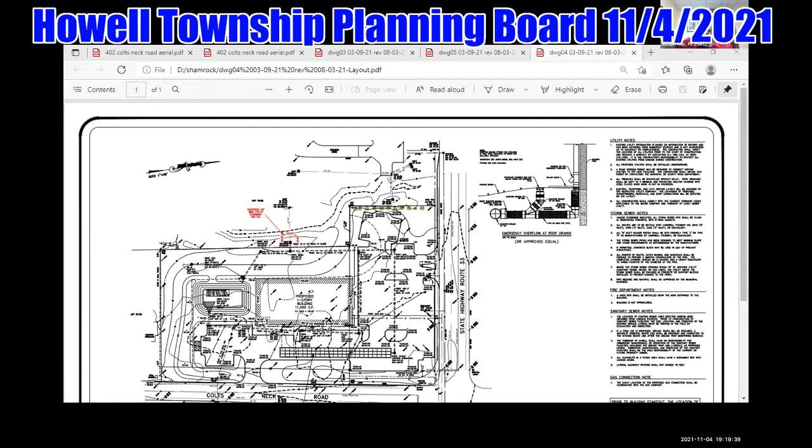We're also proposing a significant amount of landscaping within the buffer areas, which I will show you on this sheet now. You can see the plantings along the westerly line here, the southerly line, and some plants along the northwest corner of the property.

Mr. May, while that map is up, I want to focus again on the buffer, because that's the relief you identified earlier. Behind the building, we meet the 50-foot buffer, and along the left side of the plan we also meet the 50-foot buffer entirely. Is that correct? Correct. Now, the areas where we don't meet it - first, the area adjacent to the shopping center to the east - a buffer is not required on that specific section, at least as it relates to the area nearest to Route 33.

Is that right? Yes, correct. So the only area we would need is that corner piece you identified, and I guess you'll show us with your arrow again. Yes, in this area, and there are approximately 11 existing pine trees there, ranging from 12 to 24-inch caliper, that will remain.

And what's on the adjacent property where the buffer relief is being requested? That's actually a dead end. Looks like it was put in for future expansion to this property. There's a Dunkin' Donuts commercial, that's where the strip mall is currently located. So there are no homes adjacent to the area where the relief is being sought?

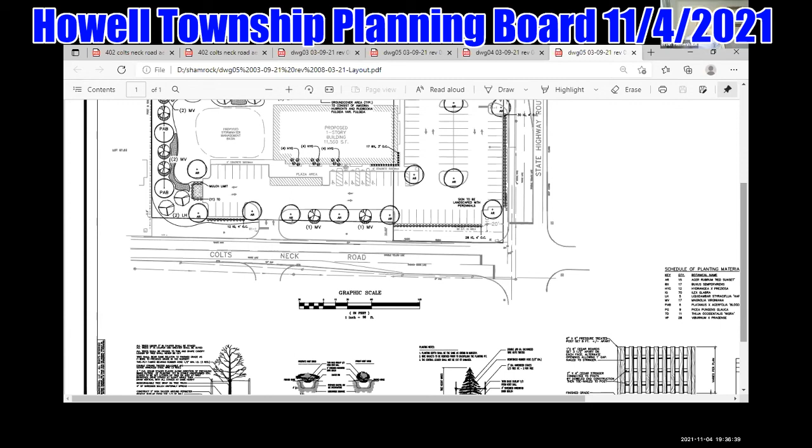Thank you, sir. All right, I don't think there's any reason to go to executive session, and our liaison for the master plan committee has dropped off. Is there any other business we need to discuss? If not, I'll entertain a motion to adjourn.